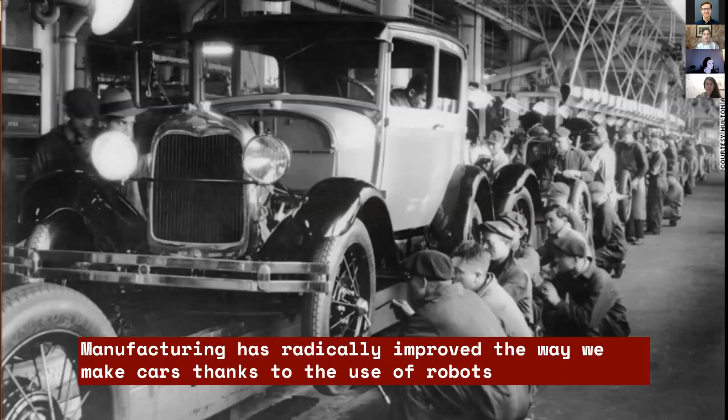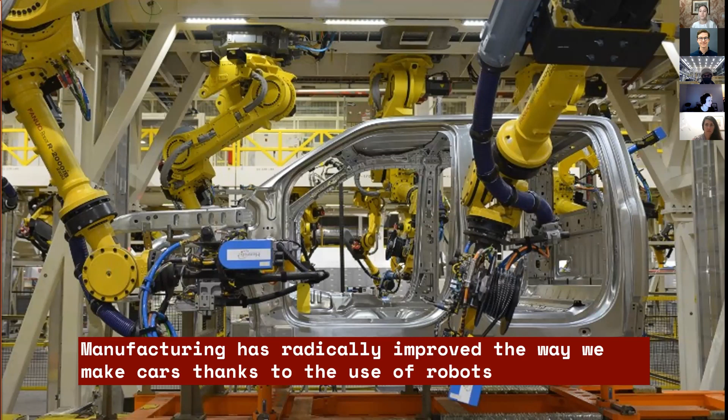We've all been familiar with this: manufacturing has radically improved the way we make cars thanks to the use of robots. It used to take over 12 hours and a half to assemble one car manually, with only a few cars produced each day. But today cars are much more complex, with way more parts — 30,000 assembly parts — yet we can send a complete truck down the production line in 53 seconds.

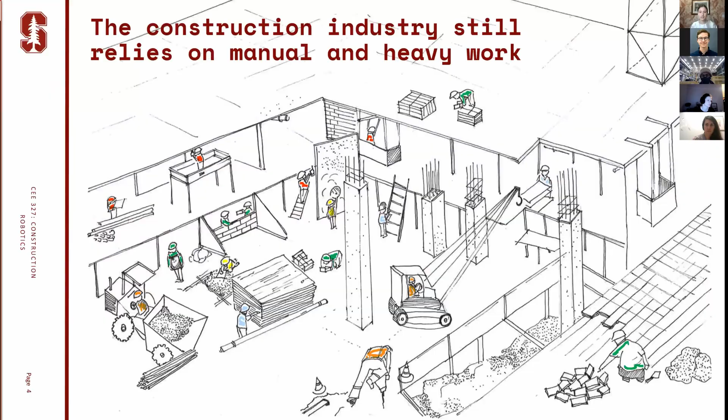However, when we look at construction, even in the last 100 years, productivity has remained mostly flat. I won't put up the same chart, but you've seen this time and time again. That's because we still rely on a lot of manual labor that is repetitive and also heavy for the workers.

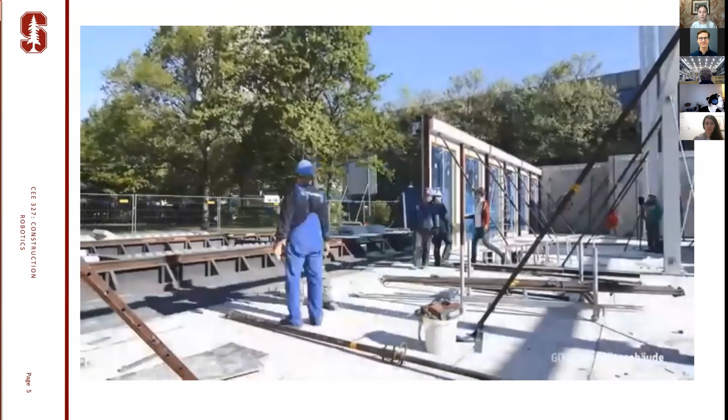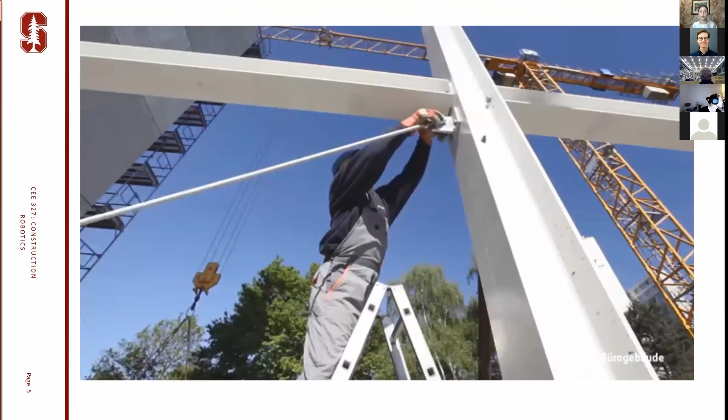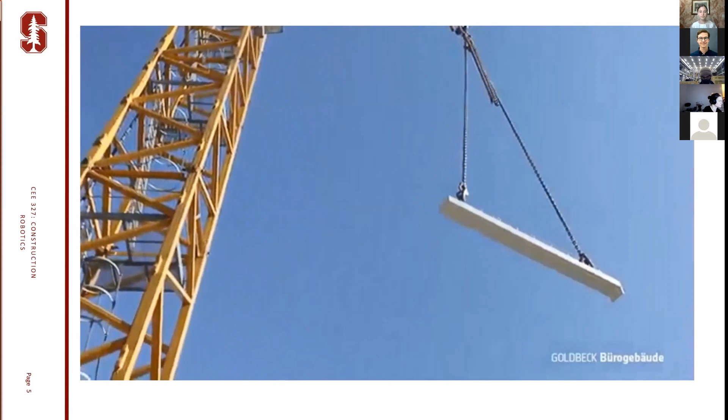In some cases, like this one from Goldbeck, one of our industry partners, there's a lot of prefabrication off-site. This has improved quality and safety by working in a structured facility. But even in these cases, there are still tasks that are strenuous and repetitive that need to be performed on site. So even if we can prefabricate and bring automation in that sense, there's still a need to assemble elements on site.

But in the last decade, we see that new construction robots started to surge that were aimed specifically to perform tasks on the field. On top, we can see Shimizu's drywall placing robot, and then Spot from Boston Dynamics, which I'm sure you're all familiar with. On the bottom right, you can see nLink's concrete drilling robot, which is similar, kind of a previous version to the new Hilti Jaibot.

And so we've seen how influential robots have been in manufacturing, but of course it hasn't been so simple for construction to just emulate what happened in manufacturing.

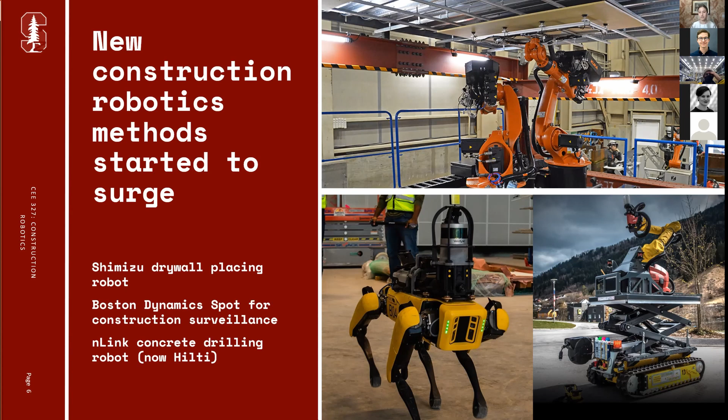So our researchers started to notice all of these new construction robots that started to be tested and applied on construction sites. We wanted to understand where the technology is now, what's the readiness of these robots for the construction industry, where are we headed, and whether we'll have a similar impact in construction as we saw in manufacturing, why or why not.

So I was actually very fortunate to learn from the first use of this concrete drilling robot in Norway. I was just starting my master's in 2017, and this was my first assignment to work on this case study. This was a robot produced by nLink, and it was used as a subcontractor on one of Smith's sites in Norway.

For me, what really struck me from this example was, okay, the technology seems to be ready because it's an actual robot that was able to operate on the field just as any other subcontractor. It performed work of good quality, and it even saw really outstanding results in terms of schedule savings and productivity. So it made me really wonder, why are we not using this more, and it really sparked my interest into construction robotics.

So today I want to talk a little bit about the points of departure from our research, a bit about how we can evaluate these new construction robots. Then I'll go into the details of this drilling robot case study, and finally I'll talk about our conclusions and next steps, and where the research has gone from that first case study.

So starting from the point of departure, as you all know, construction robots are not really new. We actually analyzed 114 papers from ISARC and ASCE from the last three decades, and we found a big spike in research interest in this topic in the 90s. A lot of the research was meant to analyze what types of tasks we can robotize, how we can bring more automation into construction, and also documenting the different advances that were happening around the world, especially in Japan.

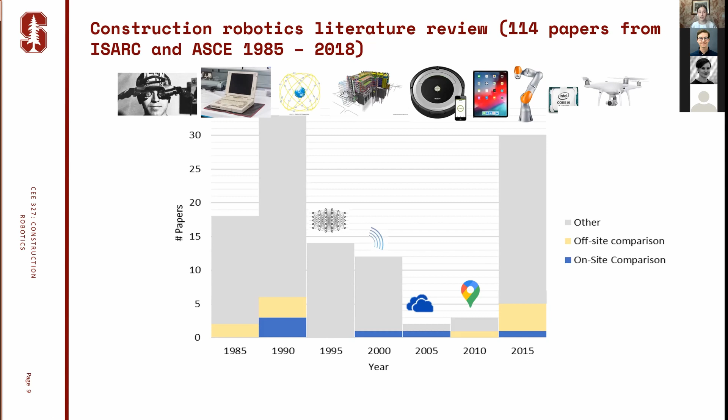So as we saw that outlook, we were interested in seeing, okay, how can we, looking at what the literature has done, evaluate today's construction robots? We noticed that one approach has been to compare the traditional method, the manual workers performing the task, versus the robots. Of these case studies, like the overall research, 16 were case studies done in this way, comparing the traditional work to the robot work.

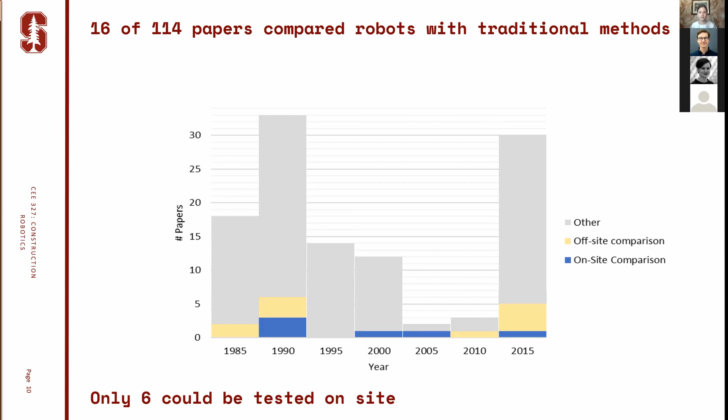But we've noticed that a lot of these cases were tested in laboratories or still under controlled environments off-site, which, okay, still gave us a lot of really good information on how the robots could be deployed. But when we take these comparisons to the field, of course we get a lot of new information and new challenges. The construction site, given that it is a very unstructured environment, still presents major challenges even with today's technologies. So we wanted to find out, in these cases, what were the types of variables and how the authors proceeded with their analysis and their comparative analysis.

So again, I highlighted here which ones were the field tests, because in this case we really had a drilling robot which was used as a subcontractor, so it was deployed on site. We were curious whether there were differences when robots were evaluated in a university or laboratory setting versus on the field.

We noticed two types of variables that were usually addressed, and we classified them between dependent and independent variables. By dependent variables we mean the typical variables you consider when evaluating a construction method: productivity, cost, quality, and safety. We tried to map which cases looked at these typical construction variables.

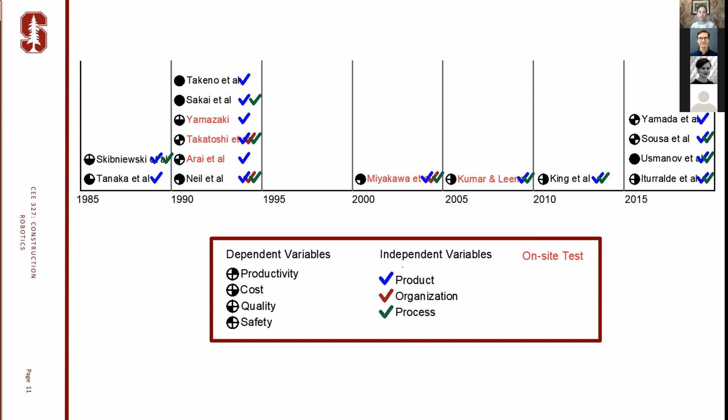But we also found that in some cases there were independent variables, which we classified between product, organization, and process. These are variables an innovator could influence. As a manager, you think about which project to deploy the robot in, which relates to physical aspects of the construction site - we classified that as product. You also think about which organizations to involve, which relates to organization, and the process of how and when to involve each organization and what each has to do, which is part of process decisions.

We realized these are things we can influence - for example, we can decide to use a very detailed building information model, and that will have an impact afterward on the quality of the product. So these independent variables could have an impact on the dependent variables.

We also realized there wasn't one consistent way to analyze robots throughout the literature - different authors focus on a few of these variables, but not all. It was interesting to notice that if we want a consistent method to evaluate robots for construction, we needed to dive deep and see what has been studied in the past. With that literature review, we had the independent and dependent variables we wanted to assess for the drilling case study.

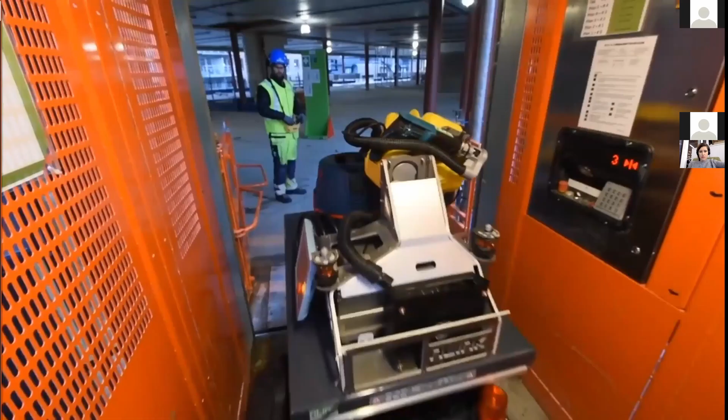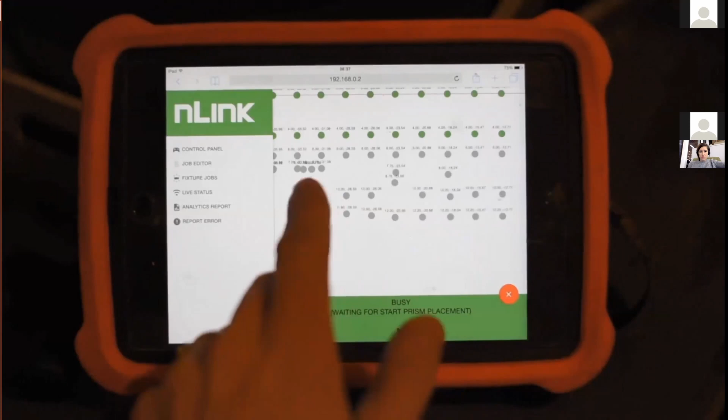We embarked on our comparison for robotic and manual drilling for installing hangers in a Norwegian project. We started working on this at the end of 2017. The concrete drilling robot was used for the first time as a subcontractor in one of Kruse Smith's projects in Norway. Its goal was to release workers from the very repetitive and strenuous task of overhead concrete drilling.

To give you the big picture before going into how we got each result: compared to manual drilling, the robot was able to cut 98% of the strenuous work hours in the drilling tasks. It also reduced cleaning time by 12 hours because it had an integrated vacuum design in the end effector. It improved accuracy from 10 millimeters to 3.3 millimeters, and rework from an estimated 5% down to 3%.

I have to admit, and I'll mention this throughout the talk, that in some cases the robot data was very easily accessible - the 3% rework was recorded, since the robot tracked every hole drilled, holes that could not be drilled, and the reasons. But for manual work we had to rely sometimes on interviews and estimates from workers who would say they usually consider a 5% rework, but it wasn't tracked in the same way.

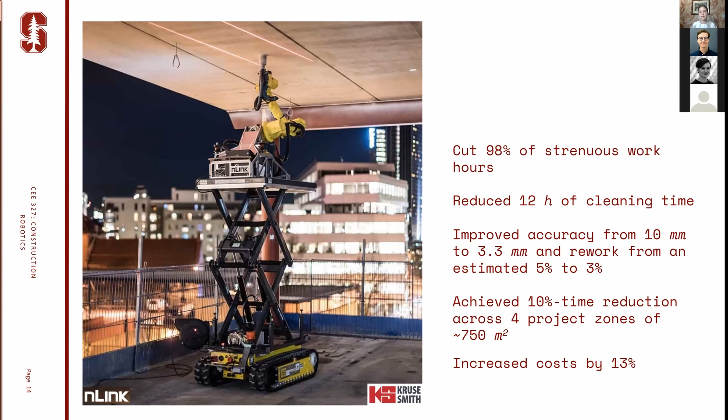The robot achieved a 10% time reduction across 4 project zones of 750 square meters, with a slightly increased cost of about 13%. Despite this extra cost, the general contractor thought the robot was better than the traditional method, especially thanks to the health and safety contributions, and advised applying the robot in future projects. So that's the big picture.

Looking at this project in more detail - since it was the first time the general contractor used a robot, it gave us a special opportunity to study the challenges and lessons learned by the company. In particular, and this was kind of a coincidence, 4 of the project zones were drilled manually and 4 were drilled robotically.

This actually gave us a really good basis for comparisons because we had the same kind of robotic and manual drilling in the same environment with the same installation crews for ventilation, piping, sprinklers, and the ceiling. So we started building up the case study as soon as the project had finished. Going back, we talked to the general contractor, and they were really interested in trying to quantify the benefits, because they had this thinking that the robot was really great and had this time savings, etc.

But they really wanted a method to quantify the actual results. So we started taking a look back and interviewing a lot of people involved in the process. We also had surveys from the 16 workers that installed right after the robot worked, and who also worked in the other 4 zones.

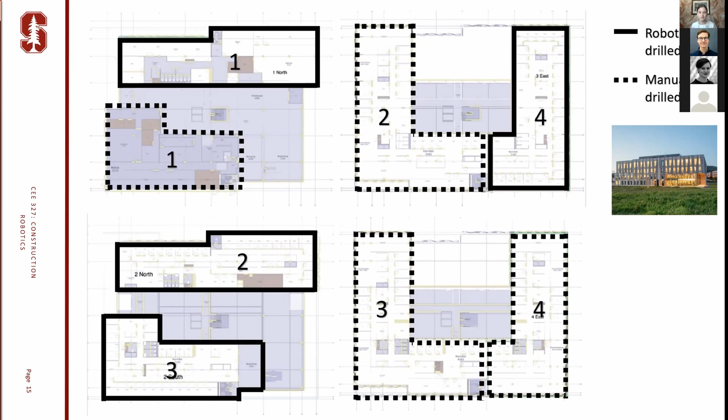Looking at this product analysis, we're talking about a single task interior robot, only designed for concrete drilling. We can talk more about the hardware if you're interested. It had this mobile track and lifting platform, depending on one operator that moved the robot around with a tablet and a joystick. But once the robot was set in position within its workstation, it could autonomously drill all reachable holes. It required power, and given its weight and dimensions, you also needed an elevator on site to transport it to the right location. The optimal reach was between 2 meters and 3.5 approximately.

These parameters, when you look at the construction site, it was really feasible to deploy this robot in this case because you had an open space commercial project. The heights were about right for the robot, and so most of the holes were reachable, and it was a flat ceiling.

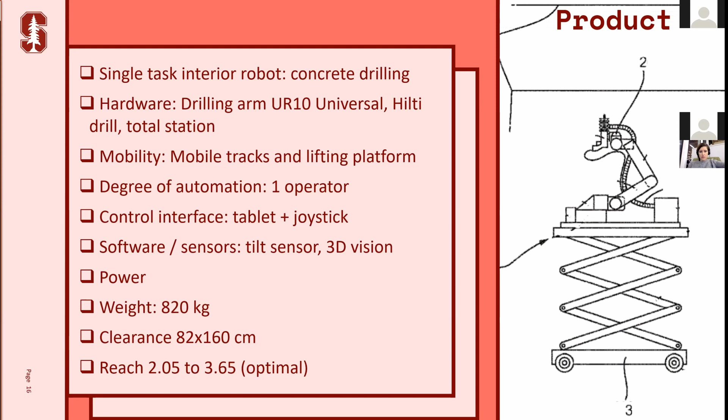Going a little bit into the organization - in this case, the robot operated as a subcontractor. It collaborated with the other trades on site: ventilation, piping and sprinklers, electrical, and ceiling. At first, the trades did see the robot as a competitor, so it was challenging from an organizational perspective to introduce the robot because obviously the robot reduced a part of the work scope.

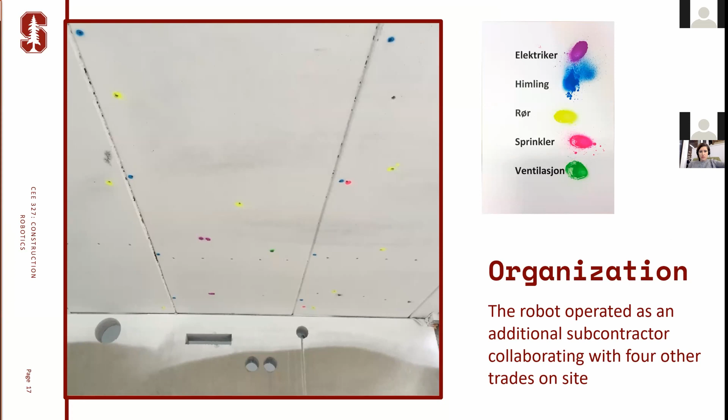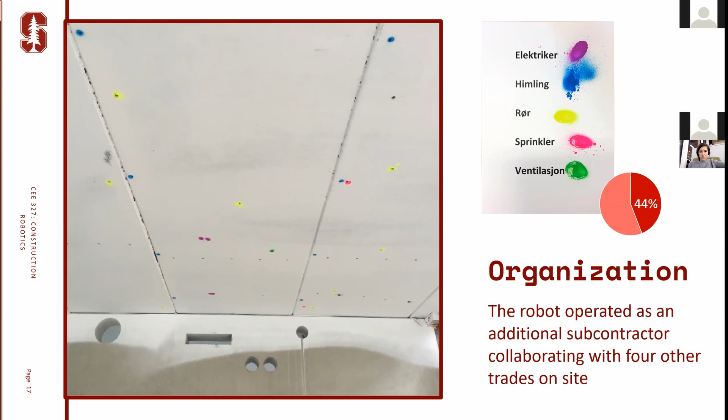Of the 16 surveyed workers, 44% stated that this reduction of their usual scope was the worst aspect about the robot. However, 14 of the 16 workers found some benefits to using the robot, like early finish, less physical strain, and more accuracy.

A paper from Taylor and Levitt, I think from 2005, pointed out that when we're talking about diffusing innovation in a project-based industry like construction, the number of organizations that need to come together to use that innovation can be a barrier in itself.

In this case, for the innovation to be successful in the project, we had to align several subcontractors. If you only use the robot for one sub, then you would miss on the synergies of drilling everything in one robot pass for all the subs. So having so many participants made the coordination a little bit more difficult, but it was necessary for the robot to be successful.

So the organizations went from 5 participants to 7 when we look at adding the robot and then a third-party modeler, because in this case we needed certainty of the hangers, and so they had to be modeled in 3D, and that wasn't something the subs would normally do or had the capacity of doing, at least in this project. So they had to hire an external entity to do that modeling.

We can also highlight other aspects about the organization, and the literature suggests things like: what's the worker's experience? Is this a task where we have availability of workforce? In this case, there was enough availability of qualified workers, but it might be impactful in other tasks. Unions was something else that was brought up, but in this case they mentioned it wasn't particularly important because there was a good safety net in Norway for workers.

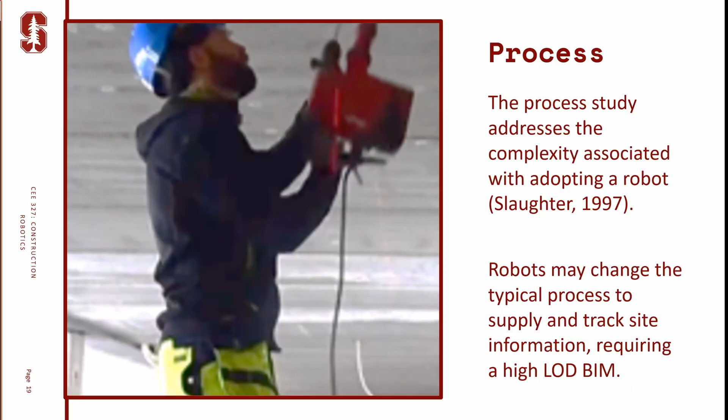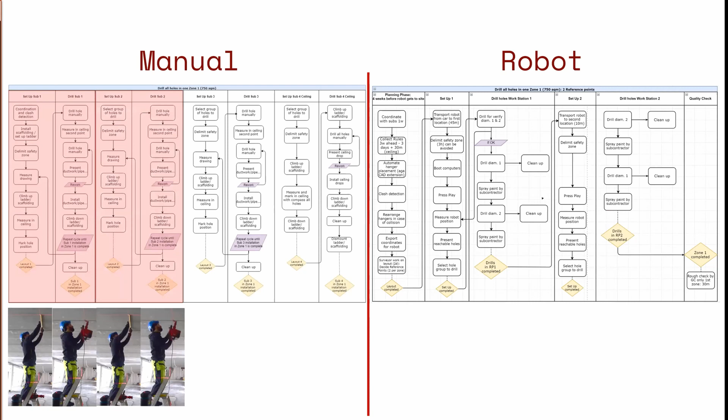Looking at the process map from the manual side - the baseline scenario - we see that each subcontractor occupied a zone at a time, alternating the drilling with placing a section of pipe or duct before drilling the second hole. This was true for all subcontractors except the ceiling one, which, similar to the robot, was able to drill all the holes in the ceiling in advance and then place all the ceiling drops, because it's a very modularized system - but it wasn't true for the other subs.

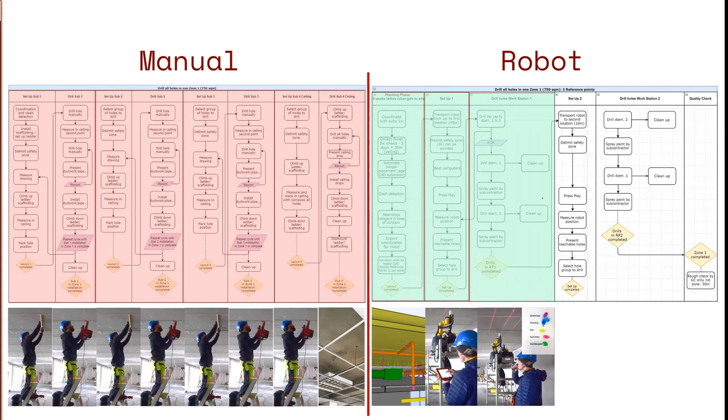On the other hand, with the robot we see first a lot of tasks related to getting the right information, doing extra clash detection to make sure the holes are in the right position. The work was organized within workstations - each workstation was an area where the robot could drill autonomously without needing to reboot computers and do a new setup. Given the zone's geometries, we had 2 workstations per zone. The task is divided into setup, then robot drilling, and the subcontractor would do the color coding right after - he could have his coffee and enjoy some time while the robot did the hard work of drilling. The same applied on the other side of the zone, and finally there was a quality check at the end to make sure everything was okay.

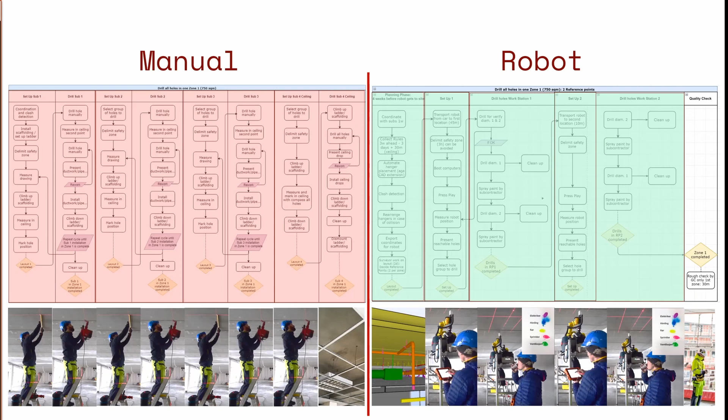I also wanted to highlight that this color coding was considered a really good and transparent method to keep track of the progress of the different subs on the field.

There was detailed information needed about the task - as you can see here, it's a really detailed building information model at LOD 400. We needed information about the X and Y coordinates, the depth of each hole, diameter, and also the trade, to be able to color code it afterwards.

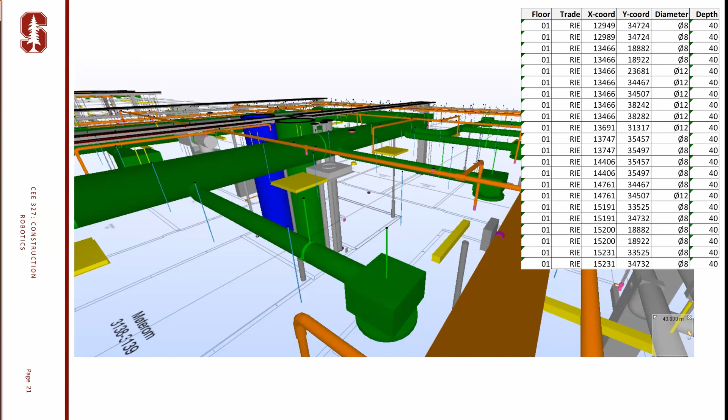This certainty in the BIM coordination, even though it took some time, brought two other key benefits. It resolved 50 clashes in the Solibri model checker that would have otherwise appeared on site, and Chris Smith estimated it would take about 10 hours to solve them in the field. Workers also mentioned that spatial conflicts were reduced in the zones drilled robotically. It also allowed, with the LOD at 400, prefabrication of hangers because we also had the detailed design.

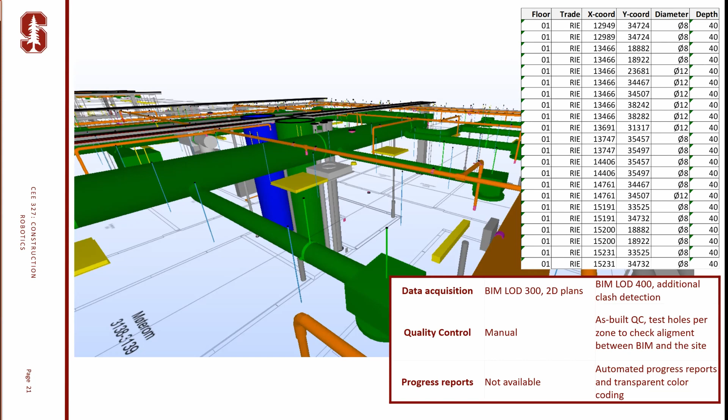All of these things came from having a very detailed building information model. Of course, manual work could have also benefited from that, but only robotic work was planned with this approach. So we wanted to highlight the benefits of having this building information model in a very detailed way.

These implications on product organization and process decisions can now be analyzed in terms of safety, quality, schedule, and cost, which are our main dependent variables. I'll quickly go through these four.

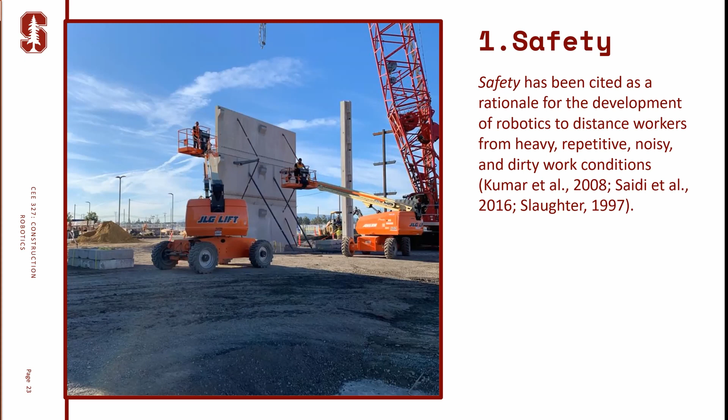Safety is paramount, and in many cases it's the motivation to deploy robots in construction. We usually want to distance workers from very heavy, repetitive, and noisy work conditions. We know overhead drilling is a task associated with really high rates of shoulder pain and muscular disorders. But when we wanted to determine, in the case study, how many incidents occur in a project or what the impact on insurance rates could be if we use a robot, it was actually very hard to come up with a number. It's something we're currently working on - how to better estimate this or associate cost impact with the safety benefits of the robot - but so far it has been difficult.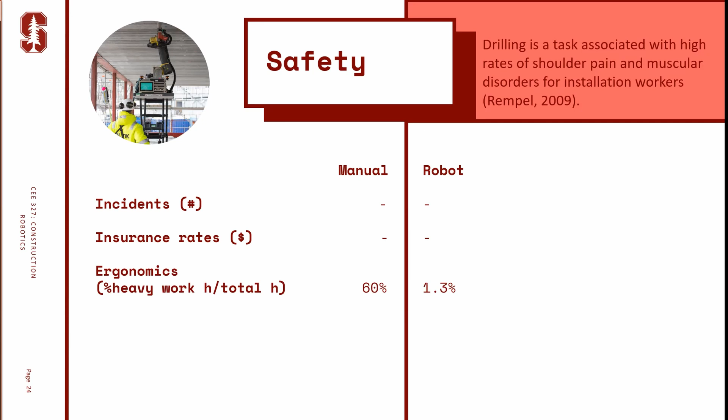What we could do was analyze the percent of heavy work hours over total work hours in the task - looking at it from an ergonomic perspective - along with qualitative data from the work conditions that the workers discussed. The robot had the chance to distance workers from the noise and absorb the dust from the drilling hole.

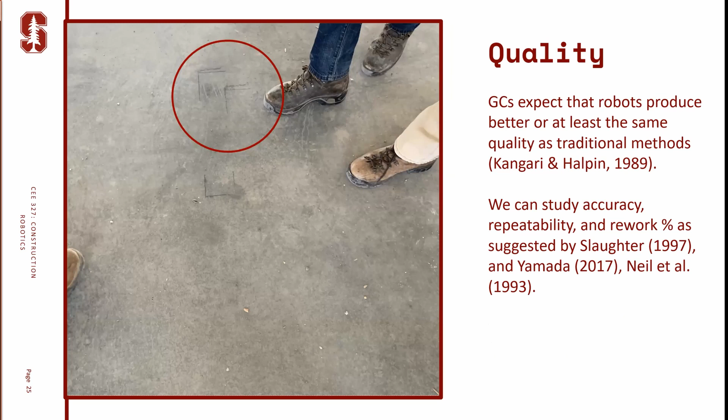From a quality perspective, when we talk about robots in construction, we expect them to have better or at least the same quality as traditional methods. So we can study several variables like accuracy, repeatability, or rework. In this case, the question of how accurate the robot is was kind of difficult to answer.

It wasn't as straightforward as I would imagine it to be. The robot arm itself had a repeatability of 0.1 millimeters. This means that if nothing else changed in the setup, and you ask the robot to re-drill the same hole, it will hit the previously attempted hole 100% of the time.

However, because of calibration of the total station and the ceiling plane sensor, the robot company talked to the subcontractors and asked what's the acceptable maximum deviation you have right now, because we want to make sure we're respecting that tolerance. The manual workers estimated that 10 millimeters was an okay manual accuracy.

So the robot tried to hit the 10 millimeters, but when they actually measured it, they were a bit more accurate, with an overall accuracy of about 3.3 millimeters.

Finally, in terms of rework, the robot logged all the holes that could not be drilled. For example, the causes for robot rework could be that the hole was too close to the slab edge, or it was going to hit rebar so it couldn't be completed, or there was some mistake in the coordinates given to the robot.

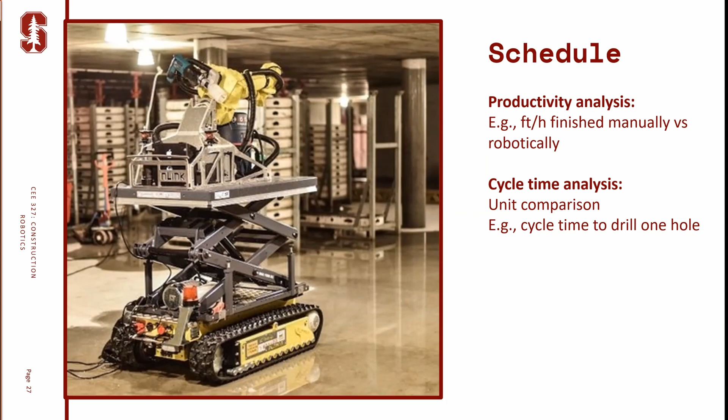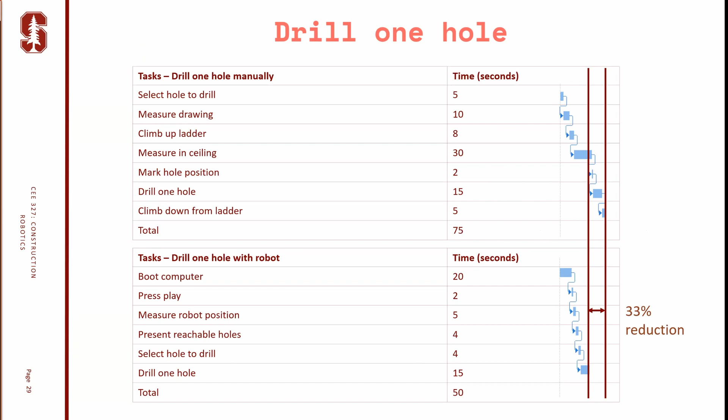So we wanted to start the analysis in that same way as the literature suggested. We looked at breaking down the different subtasks to drill one hole manually and with the robot, and we can see that the robot was a little bit faster just in the drilling of one hole.

However, in this scenario, we actually knew that the robot was able to, in the zones drilled robotically, save about 1 week. And this is what was reported from the site.

But we didn't have a granularity or a record of each task and how much time it took. So we did a bottom-up and top-down approach to the traditional schedule. From the top-down approach, we had the notion that the robot saved 1 week, and that's what we observed on site.

From a bottom-up approach, using the very detailed process diagrams, we asked the managers and workers how much time they estimated a particular task took. So we tried to build up the schedule from scratch, also using cycle time analysis from videos of the robot working and the manual workers performing the task. And we knew, of course, the exact number of holes.

So it took us some effort to produce the schedule, and we realized that in future projects we need to document properly as the task is being done. In this case, we didn't have the chance because we started the analysis once the project finished.

It was really good from the robot perspective because the robot task reports had exact information on production rates and the number of holes drilled each day. So it was definitely easier to do this kind of recap of information from the robot perspective.

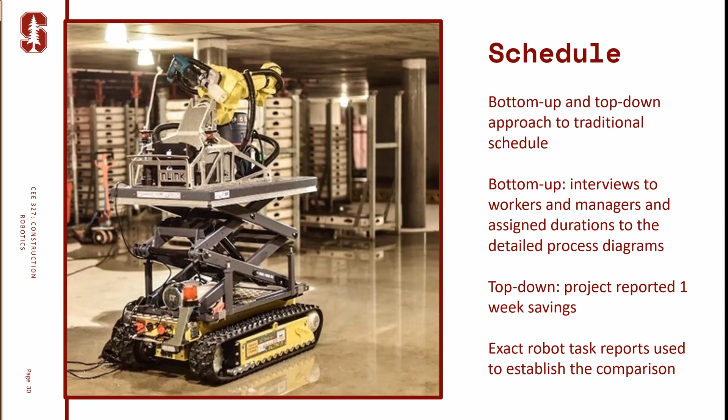So when we look at this, we started from 1 hole, and then asked, now what is the next scope possible? We wanted to find out what would happen if we only used the robot to drill 1 zone.

Given the number of holes in 1 zone and the work of the 4 subcontractors, we actually realized the robot would not be as efficient in this case, because of the considerable coordination effort at the beginning. This was due to the extra clash coordination and getting the right information from each of the subs.

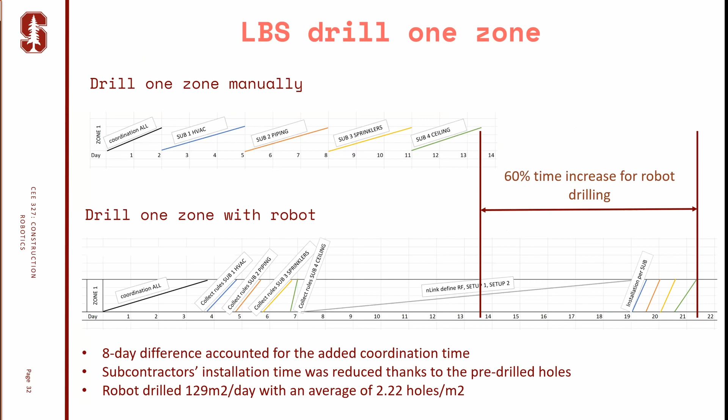When we go to the 4 zones, which is what actually happened on the field, we see an 11% reduction, so a 1 week reduction in robot drilling versus manual drilling. This is because the initial effort of coordination would be similar for 1 zone as for 4 zones, at least in this case, since all zones follow the same installation rules. The robot company said that once they do all this prep work and coordination, it's best to drill as much as possible once they get to the site, because that's how you get the most efficiency out of the robot.

After doing this, we can discuss what could be the best plan. So you can start thinking, okay, what could happen to the schedule if we also worked overnight, or if we had 2 robots instead of 1 working simultaneously. These are all things we can try to envision where robots could actually have their best efficiency. But we tried to stick to what happened in the field and reconstruct what was the sequence here.

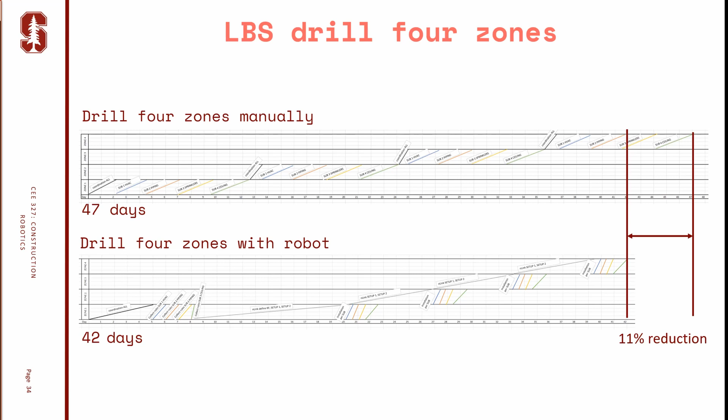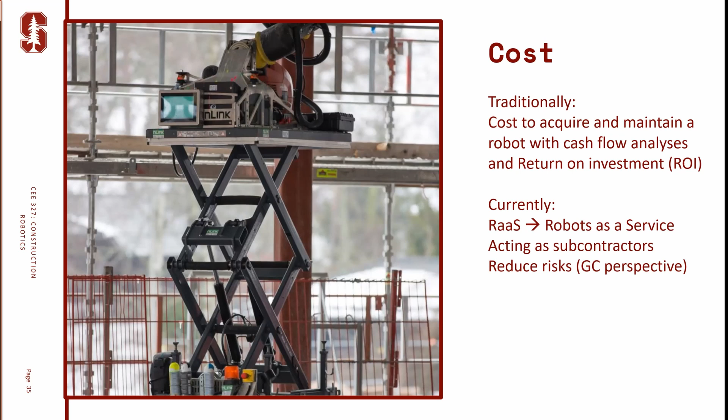Finally, from a cost perspective, traditionally a lot of the literature focuses on return on investment from robots, but today we're seeing a lot of different models. So robots used as a service, in this case as a subcontractor, and that can help reduce the risks, especially from the general contractor perspective. You don't need a big investment at the beginning of the project. You can just charge, this robot I think charges per square meter, but you can agree on a service cost that makes sense for the project.

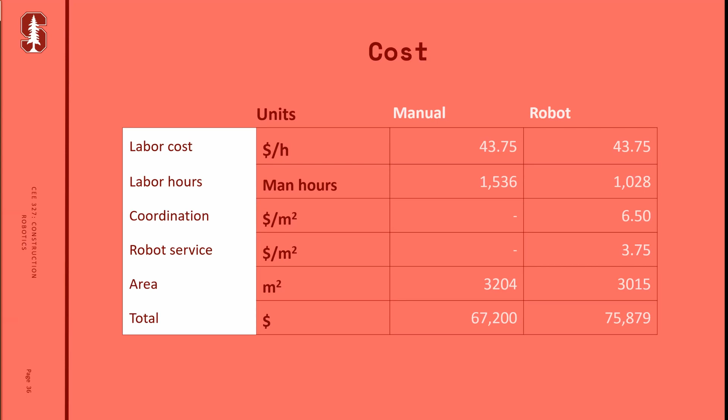That gave us a 13% increase in cost, which was absorbed in equal parts by the 4 subcontractors, the owner, and the general contractor. It was a special situation because it was the first time it was being deployed, and that's why it was divided in equal parts. In the future, it would make sense to see how each individual sub is benefiting from the whole, so instead of charging per square meter, you could think of ways of charging per hole and figure out which sub had the most holes, or some other way of figuring it out. But in this case, they just divided it equally.

Some challenges on this analysis were, in a sense, the lack of traditional data. We had to rely a lot on estimations and interviews, and also trying to define what's the right comparison boundary. We saw this could be challenging for different tasks. In this case, we accounted from the coordination process until the quality check process, but depending on how you decide your comparison boundary, you might also see the benefits from a different lens.

Then some challenges specifically from the application: the second one, having to coordinate the information from the trades, was actually quite challenging. Afterwards, the company was also working on having Dynamo scripts to automate the holes placement. But we figured out that when we use some of these robots, we also learn a lot from the traditional process, and sometimes even what we are lacking in knowledge from the traditional process.

This was a task typically resolved on the field with the workers' experience. But if we had to a priori ask them where would you put the holes, it wasn't so clear where the holes needed to be for optimal resistance and mechanical resistance of the materials. So it was interesting how the robot uncovered things that we need to improve.

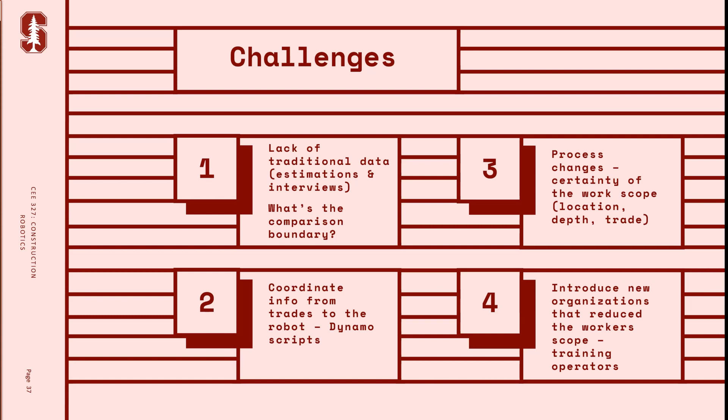So just to conclude and tell you about our next steps from this research.

After we finished this case study with nLink and Kruse Smith, we wanted to see what other robots are being tested and deployed on site. So we did two more in-depth case studies, one with Build-R and Veidekke in Sweden, and the last one with Dusty Robotics and Mortenson, which was really fun because we were able to take this layout robot to one of Mortenson's big sports center facilities here in the Bay Area.

We realized our initial thesis was that if construction companies had a consistent way to evaluate robotics according to different priorities, they could make more informed decisions about feasibility, and that could reduce the effort of deploying construction robots. From the insights of the literature review, we also looked at how manufacturing evaluates robots, and we incorporated that into our evaluation.

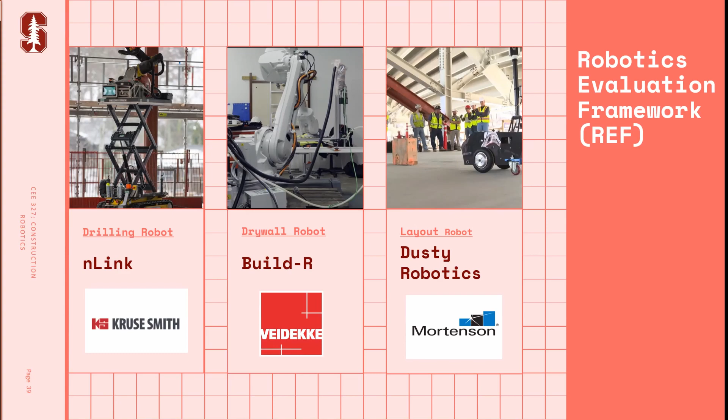And from the variables that were important in each of these cases, we developed a robotics evaluation framework. On a bigger sense, we first want to check if the robot is feasible, looking at project and robot variables about the product, the organization, and the process.

This can of course be an iterative process, because we can start thinking we're going to deploy this robot for this project, but then realize that's not the right one. So we want to make sure we select a project that is feasible, and then we can evaluate what could be the impacts in terms of safety, quality, schedule, and cost.

As we saw from some other evaluation methods, we want the possibility to weight priorities. In one task, safety could be really important, but in another, if the cost is not right, then you wouldn't really use it. So we try to align that to the client and project objectives for deploying the robot, and to be able to make final recommendations.

So right now we're working on a class with 10 robot companies. Is it recorded? Okay. Sorry, I said please mute.

No worries. Now I'm actually really excited to share this. We have developed a new construction robotics class this year at Stanford. We have graduate students from civil engineering, and each group of 2 students is working with one of these construction robotics companies, and also with a general contractor.